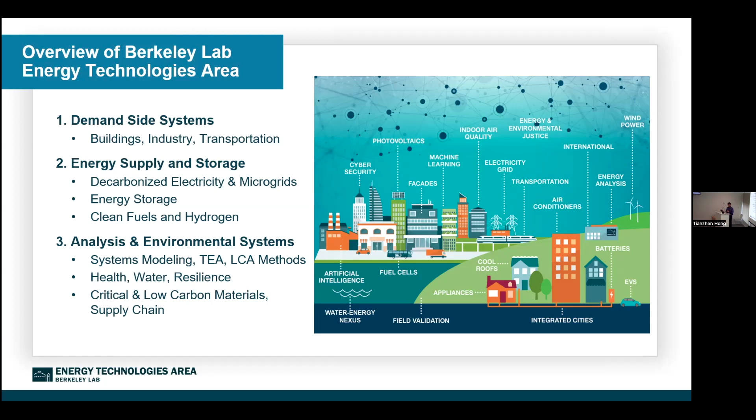And also with extreme climate and weather conditions, sometimes we have power outages, hurricanes, extreme heat events. So how do we ensure our facilities and infrastructure are resilient, and buildings can still operate during those extreme conditions, so occupants can still be safe indoors. Those are also very important aspects to consider when we try to design and operate our buildings.

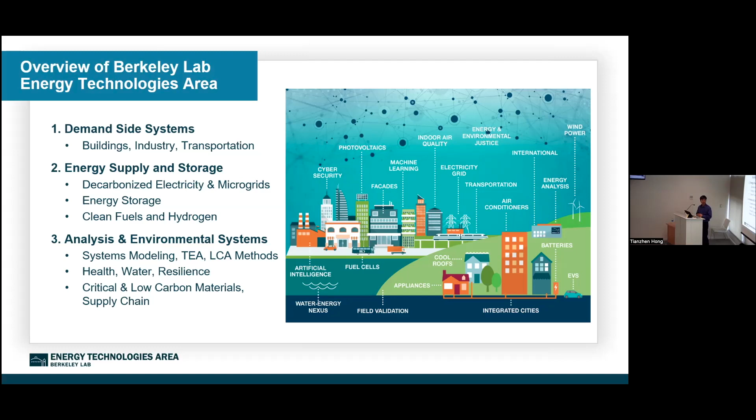Supply chain, I think this is also a new area. The Department of Energy is supporting a couple of programs that try to look at the supply chain security of materials and equipment.

So the lab was founded by Ernest Orlando Lawrence in 1931. He's a physicist in nuclear physics, and he won a Nobel Prize in 1939. But Art Rosenfeld is the original founder of our energy technologies area. That was in the early 1970s, during the first oil crisis, the embargo. He was actually a physicist, a student of Fermi, but then he got assigned to think about how we can reduce the demand from our buildings. And so he founded what was called the Building Science Research Center at the time. It just started with a few people, and now we have evolved into a 450-person research area.

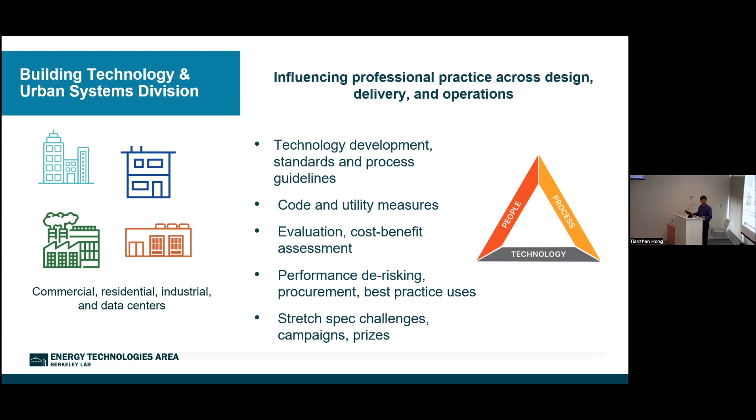So I mentioned some of the window technologies, but basically, from the double pane low-E, we're interested in dynamic windows because our building loads can be different at different times of the day, different days of the season. So sometimes we want the heat transport in this direction, sometimes in the other direction. So how can we make sure our window has dynamic performance? So that's also a research area we've been working on for a long while.

And I mentioned the co-benefits of health as we try to decarbonize our buildings. Can we ensure that our buildings are also healthy and climate resilient? We also work on grid integration. So this is grid-interactive efficient buildings. So we led the development of this roadmap for the Department of Energy.

But basically think about a building: you may have on-site energy generation from PV, you may have a battery, you may have EV charging, all those loads, how you integrate them together. Also consider the supply signals from the power grid. So these are emerging opportunities. And of course, earlier I mentioned storage. It's a key piece of this, trying to balance the supply and the demand during different times of the year.

We have a research area led by our division director, Jessica Granderson, basically looking at the opportunities of AI, machine learning, or traditional data analytics to understand how our buildings operate, how our occupants are consuming energy. This is how much is for lighting, how much is for HVAC systems, how much is for all of that stuff.

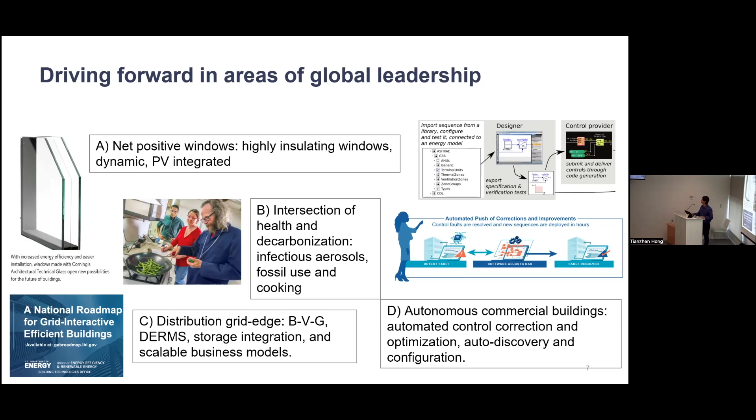So that is a very practical research area that Jessica is leading, and there are companies interested in working with us, basically testing their different kinds of algorithms. They want to see whether these algorithms perform better than the others, and so that's a research area. We developed tools. Later I have some examples.

Okay. I mentioned we work with different types of buildings, and within a building, we work from component to system, whole building, whole home, and also communities. So what's illustrated here are a few programs funded by the Department of Energy. One is efficient and healthy schools. In yesterday's workshop I talked about our schools, and the federal government and also California's state agency funded a program basically trying to improve the energy efficiency, but more important, the indoor air quality of schools.

Some of the schools traditionally don't have air conditioning during summer, but we experience more hot summer days. So in some of the classrooms, through measurement, we found the temperature up to 30 degrees Celsius, and the CO2 can be up to 2,000 or even 3,000 ppm. Under those kinds of indoor environments, students would not be able to learn effectively. So there's funding going to support schools to retrofit facilities with air conditioning, better insulation, ventilation. Those are very important programs.

There's connected communities. We think about building decarbonization, right? If we do one building at a time, it's probably going to take us a very long time to achieve our goal. So how about we do a community together? And there will be new technologies that become more effective if we look at a community scale, district energy systems, community PVs, and I think yesterday there was also some discussion talking about this. There's urban heat island. That's a research area we do.

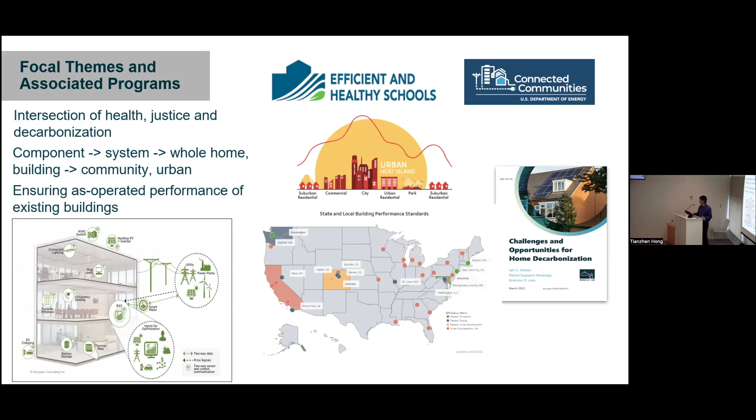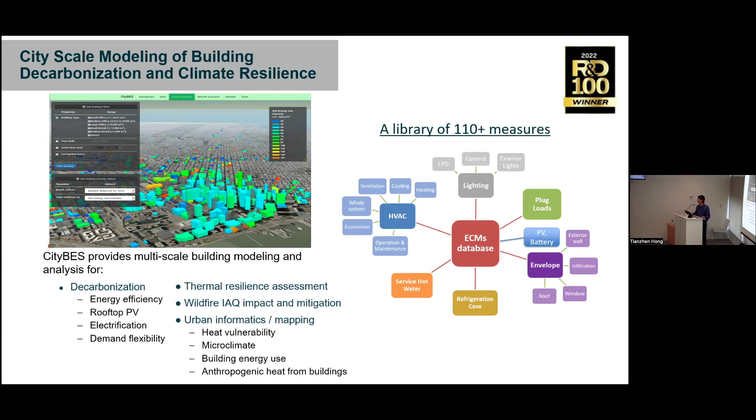So we developed tools, and this is one example of the tools, able to model every building in the city. Then you can ask questions like, for this group of buildings, if I want to reduce energy consumption or carbon emissions by 50%, what can I do? What kind of technology can I look at? We have a library of different technologies that you can apply and then do the simulation. It gives you estimates of the benefits. These tools allow the public, whatever users, to look at those scenarios quickly. It's a starting point to inform their decision making.

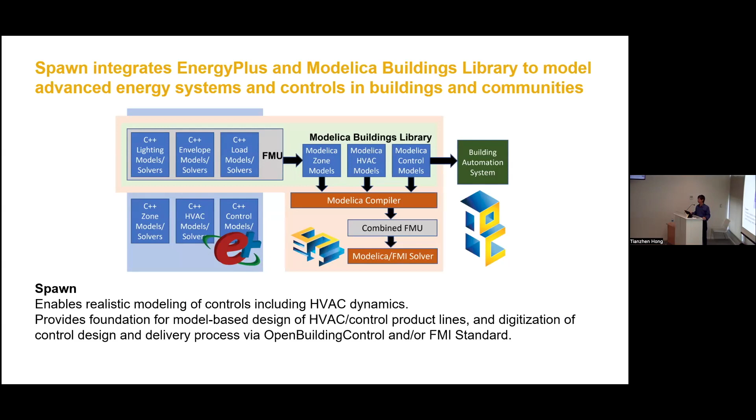If you're interested in more advanced energy and control systems, there's another tool chain based on Modelica, called Spawn. It's quite modular, similar to what Jason, your team has been doing, putting together all these different modules to create a capability to evaluate your systems and control strategies. And this is open source. The previous one is not open source, but it's free, it's open access.

We have user facilities, just a few examples here. FLEXLAB is an advanced facility that allows users to design your experiment. Each test bed has two identical cells, so it's very easy to do comparative testing. There's also one rotatable, because sometimes you're testing facade technology, where orientation and solar angles are sensitive. It is very highly instrumented. Each test cell has hundreds of sensors. Every socket is a separate meter at 1 or 5 second intervals. So you can do very precise testing, and it gives you all the data to analyze how a particular technology or control works.

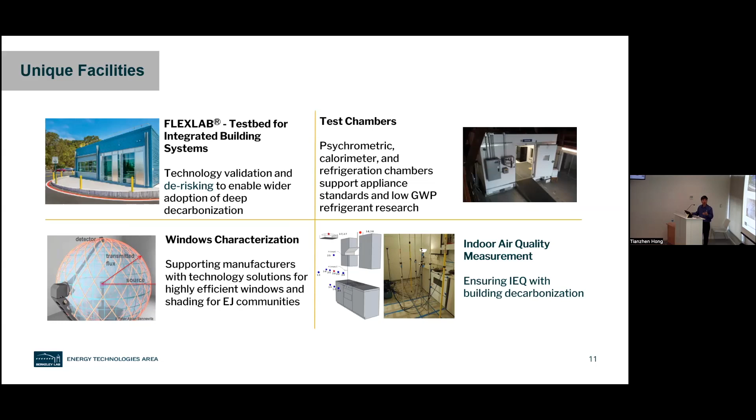We have test chambers, psychrometric chambers, and, mentioned earlier, home appliance testing chambers. We have a very high precision facility to measure the thermal and optical properties of glazings and windows. There's also an indoor air quality measurement facility, and this shows that when we electrify our cooking, there will be reductions of those pollutants. So we try to quantify the benefit of the indoor air quality improvement. So I try to give you a few examples of what we do.

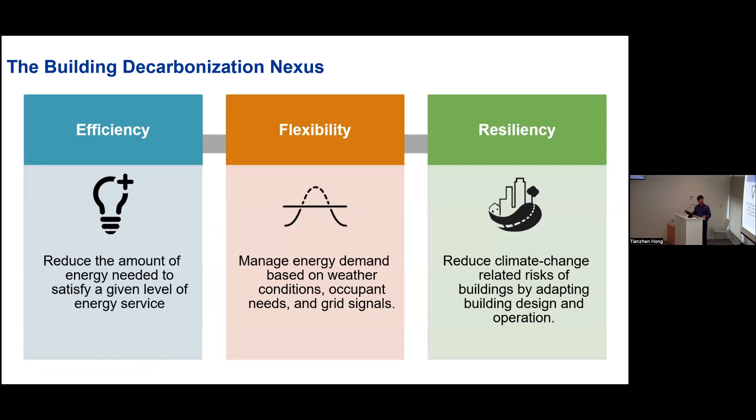We talk about decarbonization, efficiency, flexibility, and climate resilience. So this is an example. We studied 1,000 single family and multi-family buildings in Fresno, California. It's in the Central Valley of California, an agriculture-driven economy. It's low-income communities, and it also has outdoor air pollution. So the question the state is interested in asking is, for these communities, how can we help them decarbonize their building stock? What is the pathway for them to get to clean energy?

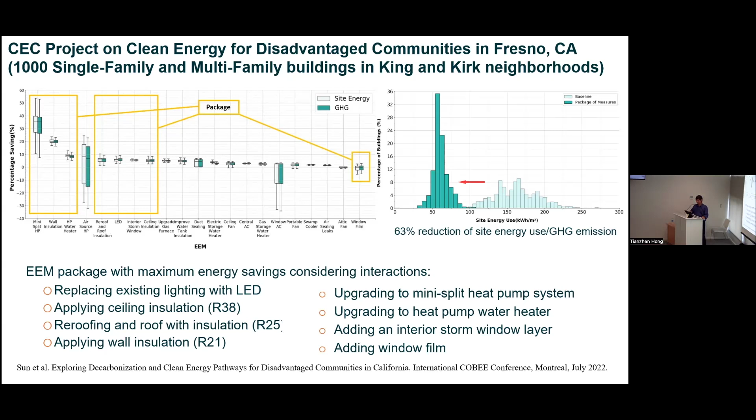summertime. So how can we design and operate our buildings and systems to use more energy during this time of the year, right? And try to use less when electricity is expensive or when it's dirtier. There's efficiency technology that tries to reduce the demand permanently, consistently. Load shedding: I dim the lights when the electricity demand is high, right? Or we relax our cooling set point, instead of 24 degrees Celsius, maybe we raise it up to 26 degrees Celsius for a few hours. Then it can help us reduce a lot of the peak demand for cooling or other services.

Energy storage can help us move the peak demand energy need, right? We charge our storage systems during the night and use it during the early afternoons. So these are the different kinds of technologies that can help us achieve energy flexibility. In California, our peak electricity demand has shifted to the early evening, from 4 p.m. to 9 p.m. And residential customers have to pay a much higher price if they use electricity during this 5-hour window.

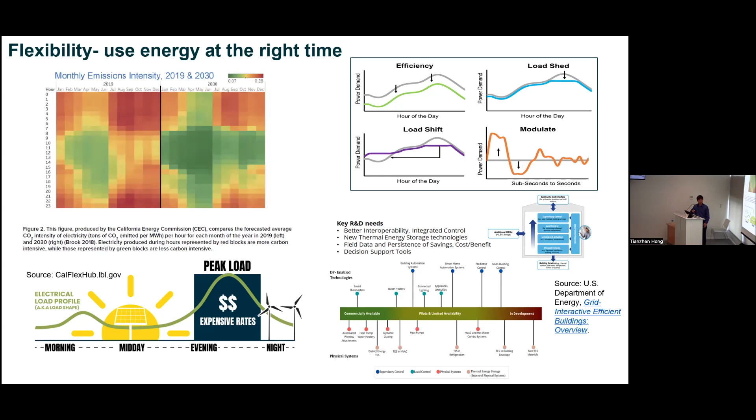So that is a motivation for residential customers to think about, right? You want to do the laundry not in this period, right? You want to charge your EV maybe during the middle of the day or some other time, to save the utility cost. Another example is to look at climate resilience.

We use the same tool I mentioned; this example is about a very hot summer day, like a heat wave. We look at the historical heat wave of 2006. In Fresno, for 5 days in a row the daily maximum temperature was higher than 111 degrees Fahrenheit. At times like this, the worst case would also trigger a power outage. So we're interested in looking at the scenario: if there's a power outage right during these 5 days, what will the indoor temperature be? Will it cause extreme heat risk to the residents?

So we look at some of the passive technologies, and passive means these are technologies that do not need energy to operate. As you can see, a lot of technologies are about reducing the solar heat gain through windows, right? Solar shading, better performance windows, and the solar film mentioned earlier try to reduce the heat transfer through the roof. We also look at natural ventilation. It can be a very effective measure to help mitigate the heat risk during this kind of extreme situation.

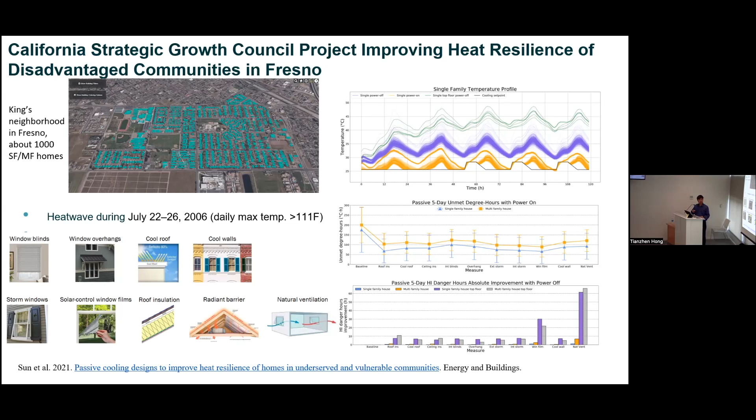Because what happens is your building can trap heat indoors, causing your indoor temperature to actually be higher than outdoors. So it's obvious, right? You want to open windows to try to relieve the heat. This is also something very easy to do. We did some simulations showing that by applying all these passive measures together, we can almost eliminate the dangerous conditions, using the heat index as a metric. But that is the dangerous condition. If you still want to maintain comfort conditions, these passive measures definitely are not enough. You will still need air conditioning.

So, with technologies we develop, and this example is model predictive control. A lot of the buildings operating today are based on rule-based control. That means at a certain time, I turn the system on. At a certain time, I turn the system off, or I adjust my thermostat set point. But think about it: our buildings are dynamic. Our weather conditions are changing, occupancy is changing, loads are changing, the electricity price from the power grid is changing. So how can we optimize our building operation to minimize utility costs or minimize carbon emission?

So basically, we developed this MPC. It takes the prediction signal, the signal from the power grid, and through optimization we're able to optimize our building operation. We demonstrated this in real buildings, an office building on our campus, and it shows a 44% reduction in HVAC energy use. We applied the technology to UC Merced, a campus with a huge energy storage tank and PV. By applying MPC, the campus achieved a 15% reduction in peak demand, which translates to more than $12,000 per month of utility cost savings.

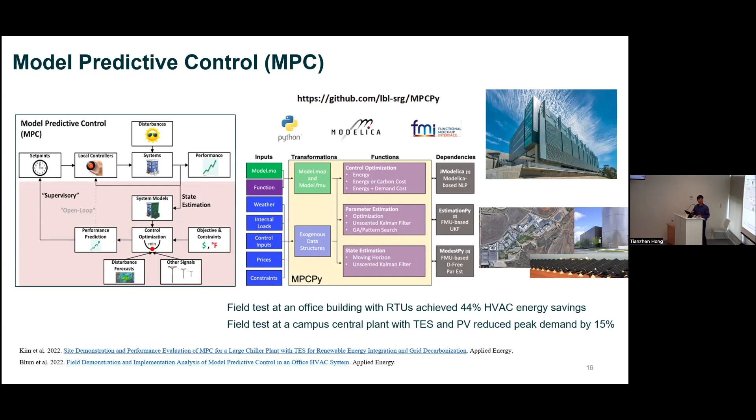I mentioned connected communities. So these are a program funded by the Department of Energy. It's 10 projects, a total of 61 million. And I think there's a call for proposals for Connected Communities 2.0. So basically, this is a program designed to help communities address their needs of either decarbonization, electrification, energy retrofit, EV charging, or some other kind of climate resilience issue.

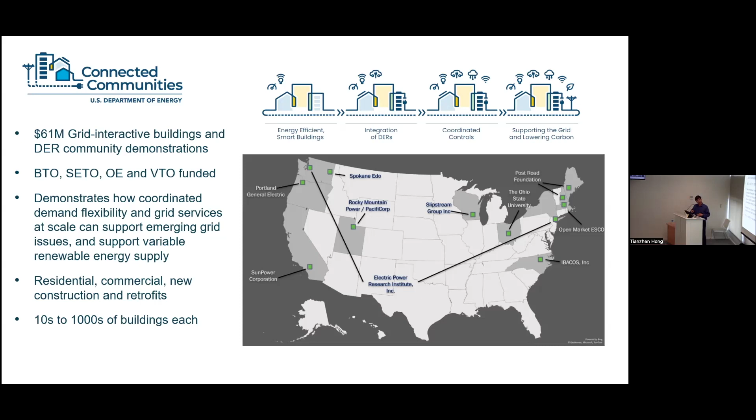So they are looking at the combination of different portfolios of technologies and how to think about cost effectiveness if they implement at a community scale. So there are projects across different states and different locations. So this is the last slide.

There's geothermal. This is for power generation, but we also use it for heating, for cooling. There's heat pump technologies. There's exascale computing. And as I mentioned, if we want to model the entire region, coupling building, transportation, land use, and power grid, we will need this kind of computing capability. And Apple's VR technology. Robotics, and I think this is particularly very important thinking about construction technology for our future, 3D printing, all those kinds of things together.

So with these 6 exciting technologies, I think there's the opportunity to think about how we apply them to our buildings industry to help us achieve our goal. So with that, I want to pass to my colleague Reshma to talk about some of the tech to market and some of the programs to support startup companies.

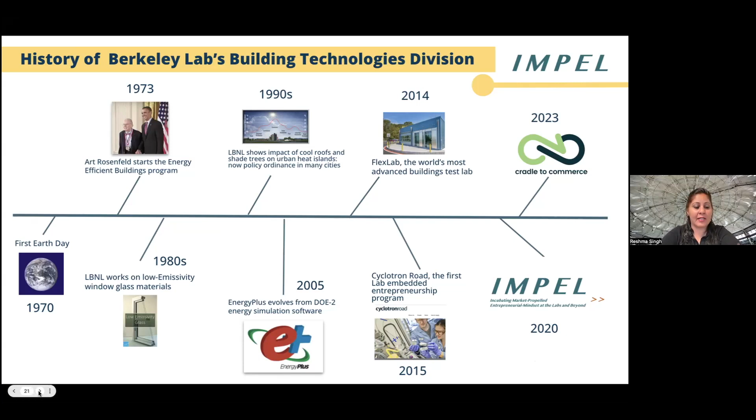So I'm happy to share more information about both these programs as they may be relevant to academics, researchers, and startups, as well as nonprofit organizations that are working in the clean energy and buildings decarbonization space. So let me start with IMPEL. Our website is impel.lbl.gov if you want more information. So IMPEL really tackles the issue of the built environment. As you know, the built environment really represents about 40% of global fuel-based emissions.

And it's a very, very important sector because globally, half the buildings still need to be built. And unlike electric vehicles and batteries, which have much shorter lifespans but are a very strong emphasis of climate tech and clean tech these days, buildings are built to last for 50 to 100 years. So we better build them right in a way that's decarbonized. However, buildings are a tough sector to invest in, particularly because of all the hard moving parts in the building, from equipment such as HVAC, which has a lot of climate implications, to building materials such as insulation, walls, and windows, some of which Tianzhen talked about in his talk.

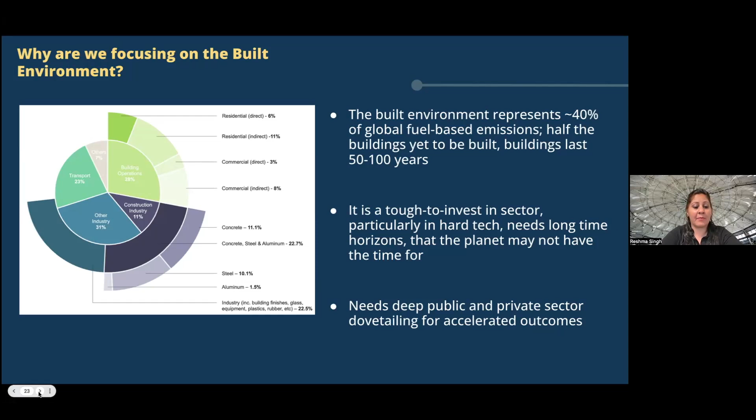And we need long time horizons to make hard technologies happen, and we really don't have the time in terms of a climate future. So we need to make sure that we accelerate these building technologies using public and private sector funding and investment. So IMPEL was launched 5 years ago. This is our fifth year for IMPEL. IMPEL stands for Incubating Market-Propelled Entrepreneurial Mindset at the Labs and Beyond. And we launched this as an innovation engine for early stage technologies. They can be researchers, scientists, professionals, and entrepreneurs. And the mission is to help you impel your building and energy innovations to climate impact. This is supported by the Building Technologies Office at the DOE, and Lawrence Berkeley National Lab implements this program for the DOE.

So what we have been doing in the past 5 years is we've been looking across the US for folks who are early stage, building decarbonization, folks who really want to move the needle and bring their technologies from early stage to commercial impact. So we've actually seen that 90% of our IMPEL innovators have begun the journey as early stage, pre-commercial inventors, researchers, and entrepreneurs.

And now post-IMPEL, you'll see that, number one, we straddle across the country. But post-IMPEL, almost 1/3 of our entrepreneurs have moved into technology and market de-risking. So really moving from TRL 1, 2s, and 3s, all the way to TRL 9s and 9+. So commercialization really is our mantra.

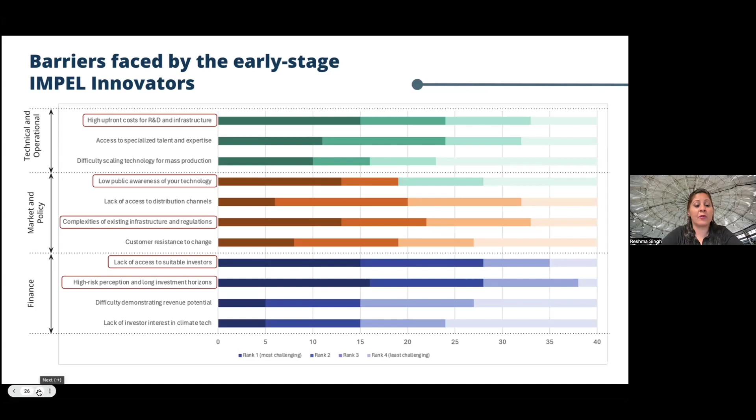So what we're doing through IMPEL is trying to target each one of these barriers by producing ways to accelerate technologies and producing pathways that our innovators can take and knock down these barriers. So our theory of change at IMPEL is to accelerate building technologies for climate adaptation. So we want to get to a carbon neutral built environment that promotes equitable wellness for all. And we take each one of these aspects very seriously.

Carbon neutral is really around decarbonization. Promotion of equitable wellness is through democratization. And we also use digital technologies to enable getting to these goals. So essentially, all of our technologies are categorized in 3 categories. First of all, technologies that help to decarbonize, which is to radically reduce emissions through embodied carbon, operational carbon, as well as using circular materials and energy flows for a circular economy.

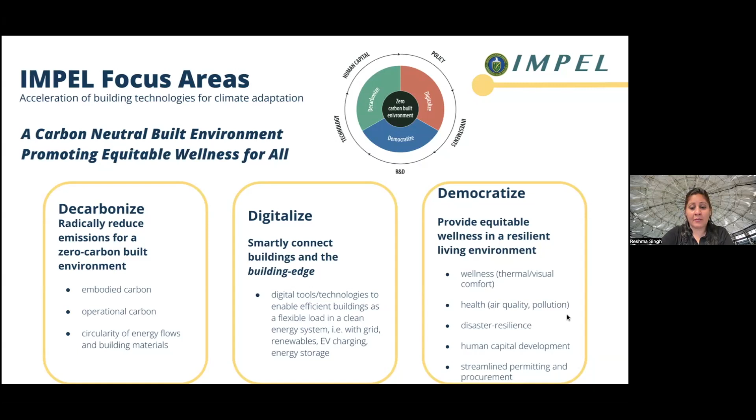The second category is digitalization technologies, which is connecting the buildings and the building's edge. The building's edge is essentially the clean energy system, which includes the grid, renewables, EV charging, and energy storage. And finally, the most important one is making sure that these technologies can be accessed by everybody equitably. So we provide democratization technologies for wellness, which includes thermal and visual comfort, for health, which includes technologies for air pollution and air quality, disaster resilience, and human capital development.

So what we offer really is 3 sets of trainings through IMPEL. It's a year-long program for researchers, academics, and startups to go through. We start with foundational training, which is through pitch workshops, mentoring sessions, as well as sessions on carbon tools to enable our technologists, our innovators to understand the carbon impact of the technologies, as well as providing a peer learning community of innovators. So that's really our foundational training.

Then half of our innovators get down selected for advanced business training, which is essentially going into business model development and selection for 3 pipelines. So we have a grants pipeline, a venture capital pipeline, and industry partnership pipeline that we help nominate our innovators for. And then finally, a little bit more color on the pipelines. We have funding and demonstration opportunities.

And here you can see a bunch of IMPEL innovators at various events, such as the DOE IMPEL National Showcase, which is held at the DOE Peer Review, the Greentown Labs Incubator Showcase, which is with private sector investors, the HUD's Innovative Housing Showcase in DC, which is actually coming up in June this year again.

And then we also nominate for various demonstration pipelines, such as with ESTCP, through the Department of Defense, through GSA's Green Proving Ground, as well as other opportunities through national labs, such as the LEAP programs, as well as Cradle to Commerce program. So we essentially have built an ecosystem of the DOE, HUD, DOD, GSA, and NASEO as a fulcrum of federal government and state government bodies that can help address acceleration of building technologies to market.

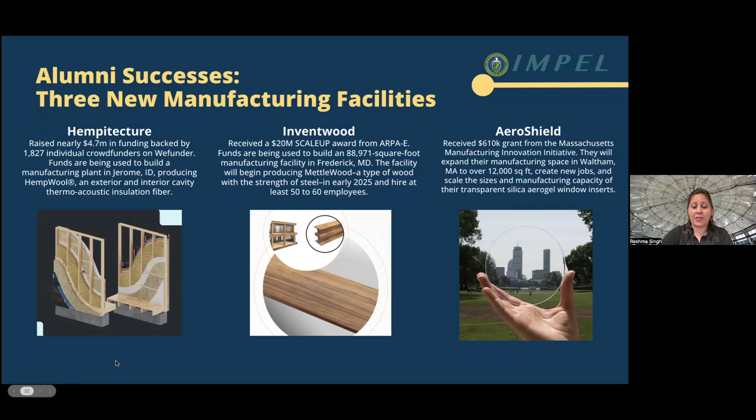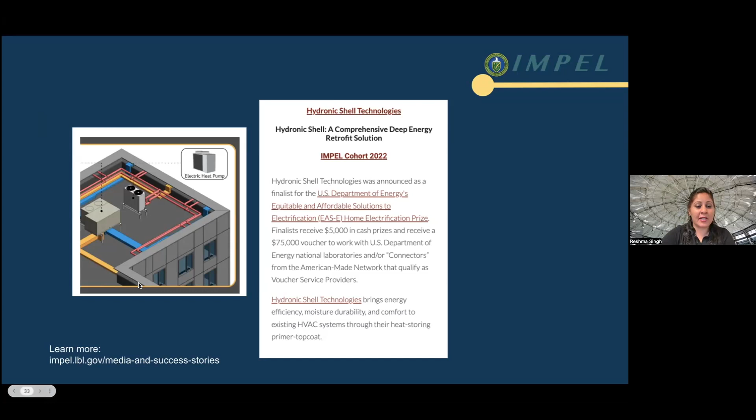Another example is Hydronic Shell Technologies, which is a very interesting startup which is actually a bidirectional startup which has been touched by both Epic as well as IMPEL. So David Goldstein went through both IMPEL and the Epic cluster, and they have been able to receive US DOE's EAS-E Home Electrification Prize, and they've also been able to test bed their very interesting hydronic shell technology at Syracuse.

So our collaboration network at IMPEL consists of scientists, policy demonstration experts, investment specialists, and entrepreneurs. And this also includes Bing Dong, who I think just became a professor. Congratulations, Bing, who is also on our mentor panel. So our community is large.

I would like to also mention that our applications open on July 15th of this year. So if anybody is interested as a startup or a researcher to help understand how to bring your building technologies to commercialization and get the heft of the national labs and the DOE behind you, please apply. Our applications open on July 15th. So that was about IMPEL.

Based on the success of IMPEL, we've launched last year another new program, which is called Cradle to Commerce. So this essentially is about bringing intellectual property from the cradle of several national labs into commercialization. So we think of C2C as an unprecedented public-private partnership to provide the infrastructure commons to accelerate equitable climate tech entrepreneurship. And our website is c2c.lbl.gov.

So if you think about the public and private sector partnership, DARPA, which is the Defense Advanced Research Projects Agency, when they invested in the World Wide Web and partnered with CERN out of Europe, they created the foundations of the internet, which is now synonymous with industry. Similarly, the US Department of Navy funded the first GPS, which is now in every watch and every phone across the globe. And NASA started space exploration, which is now synonymous with a lot of large private sector companies.

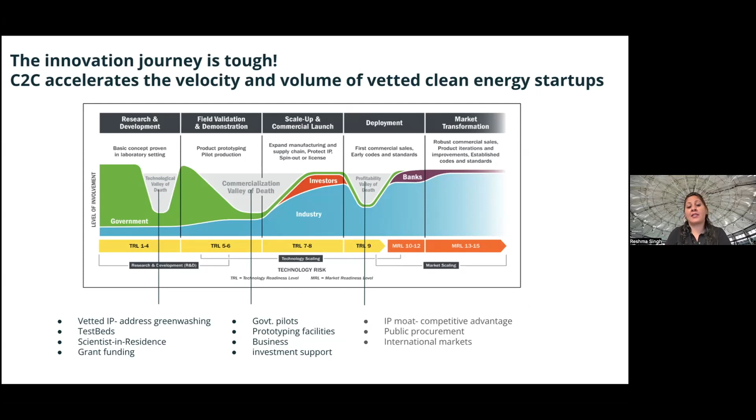And then, of course, this support will help you even when you get to the profitability valley of death by providing you access to the IP moat, which provides competitive advantage to your company, as well as access to public procurement and international markets through our DOE ecosystem. So in a nutshell, at C2C, we help to provide wraparound support for lab-to-market innovation by providing the IP, scientist in residence support, carbon tools training, mentorship support, and fundraising and ecosystem support.

And this is really important at this time because the federal government is making huge, huge investments in regional innovation ecosystems. And this is really going to be the backbone of the climate tech economy in the future.